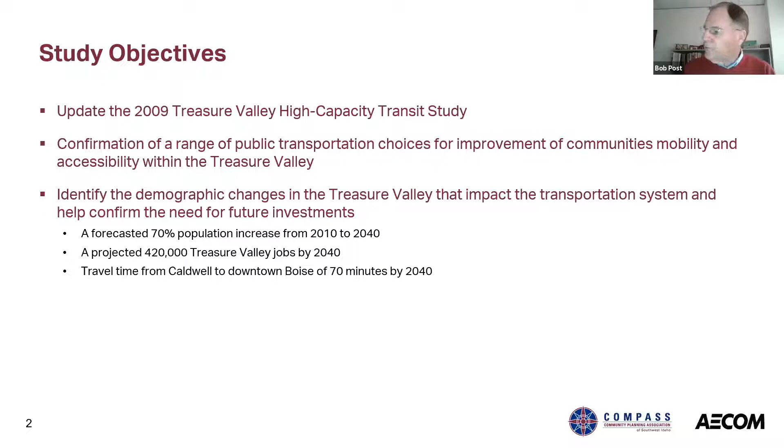It's also to identify the changes that have occurred, and there have been a lot of them in the Treasure Valley. In addition to the projected high level of increase in both population and employment, there's also, as all of you can probably appreciate, an impact on the transportation system in terms of travel time and level of congestion. So those are items that were addressed during this brief update. Next.

Before we go on, let's just step back a little bit. What do we mean by high capacity transit? Generally, as a loose definition, it's talking about transit that's faster than a local bus. That's in part because it stops less frequently and has stops further apart. Generally, it carries more people because you funnel service into it and take advantage of the capacity of these kinds of systems.

And also, they generally come with a special branding and improved services, improved dependability, and improved amenities in terms of the station stops. I want to also make an additional comment. I realized when I went back through these slides that it looks in some fashion like local bus is not an important component, and I don't want at all to convey that message.

Any community that brings high capacity transit into their mix of transit and transportation services will always depend on a local bus system that's vibrant and effective in moving trips in and around the region. So I just wanted to make that clear before we moved ahead. It's not anticipated that the local bus service goes away or is not an important component. Next.

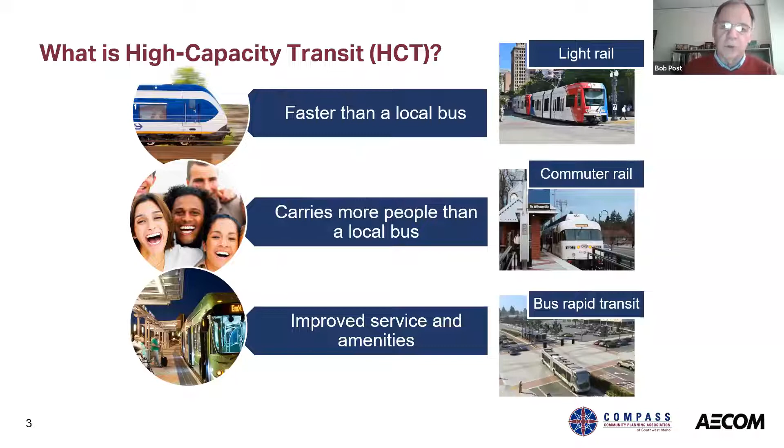I want to introduce you to the 4 basic alternatives that are being considered and were considered as part of this study. The first one is called bus rapid transit, and we further define that as in mixed traffic. So it's an alternative that has buses for the most part operating in mixed traffic except at major points of congestion, where there may be specialized treatments in terms of the signal system or lane allocation in order to allow the buses to get through those areas quicker.

The stops would be less frequent than the typical 2, 3, or 4 block spacing that you see of the local bus service. So maybe in the range of a half mile to 2/3 of a mile would be typical for these kinds of projects. Generally, we try to brand the system in terms of the signage, the buses, the stops, and upgrade the stops and the shelters for these types of applications. Of the alternatives we're looking at, this is the least capital intensive in terms of cost.

Next, we have a second category that we've looked at in terms of bus rapid transit. This is bus rapid transit exclusive, which, as the name implies, means that a good portion, if not all of the alignment, would have the buses running in a segregated exclusive kind of operation. On the left side, you see lanes that are totally dedicated to the bus. That's from Eugene, Oregon. The 2 photos on the right are from the LA area, where a portion of the orange line runs in an abandoned rail right-of-way. Other portions run in a lane dedicated to transit, but only striped with rumble strips in between the general traffic. This would have wider station spacing, so maybe a half mile to mile spacing.

The stations, as I mentioned for the other BRT alternative, are upgraded in terms of the amenities, and often the buses used for these types of systems would be larger buses. Articulated coaches would be fairly common. The cost would be higher because you are creating a dedicated right-of-way. Next slide.

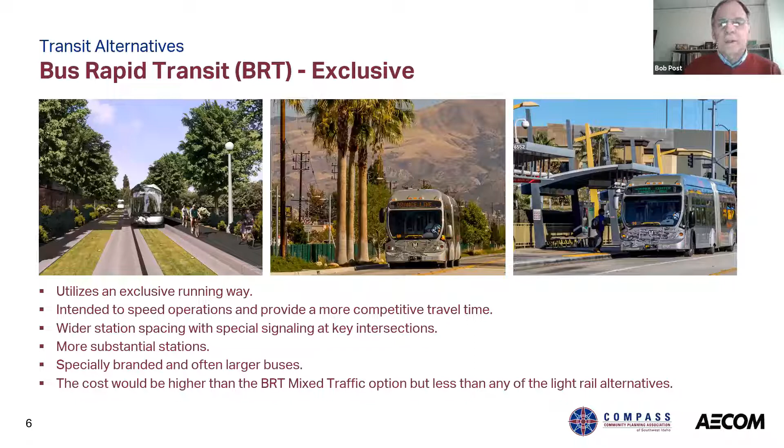Next slide is light rail systems. You may be familiar with that, in that there's a number of systems in the Northwest using light rail, electrically powered. They generally operate in exclusive right-of-way because they go at higher speeds, and they provide a more reliable service because they are segregated from general traffic. Stations are more robust and on average may be somewhere in the half to 1 mile station spacing. The crossing of streets, even at a station location, most times would require protection, either gated protection or use of the street signal system.

These systems can also, in order to add capacity, have multiple units. In other words, besides being able to operate as a single vehicle, it could operate connected as 2 or 3 or more vehicles to address capacity over time. And as you can imagine, because it has its own right-of-way and is segregated from other traffic, this is a higher cost alternative compared to the others. Next.

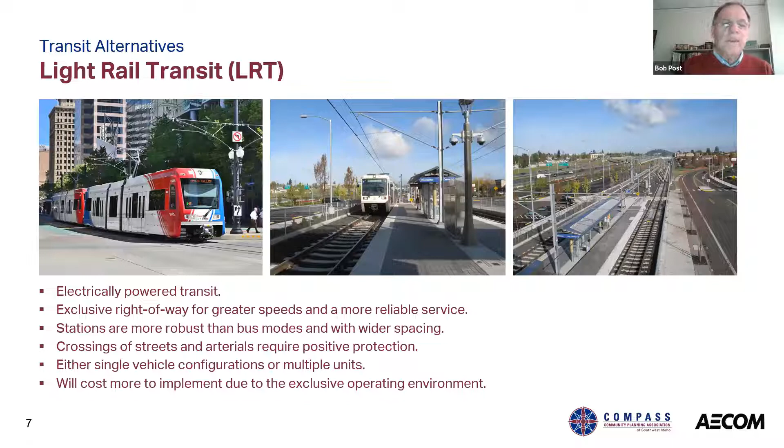The last category is commuter rail, and commuter rail has higher speeds. Generally, station spacing is much more, ranging from 3 to 5 miles between stops. Many of these systems have been implemented using freight rail right-of-way that's either been abandoned for freight use or is lightly used for freight operations. It uses a range of technologies. It could be either diesel or electric. Those are the 2 most common. Okay, next.

What I just went through was the 4 alternatives, and I wanted to show how they relate to each other in terms of the speed of operation, with higher speed alternatives shown higher in this graph, and whether they serve a regional or local level. Certainly commuter rail and light rail are often seen as higher speed operations because they're usually segregated from general traffic. Bus rapid transit covers the whole gamut. It can be in mixed traffic or in segregated traffic, as we discussed before. And then we're showing other services such as local service and some other special regional services, and whether they're more of a regional nature.

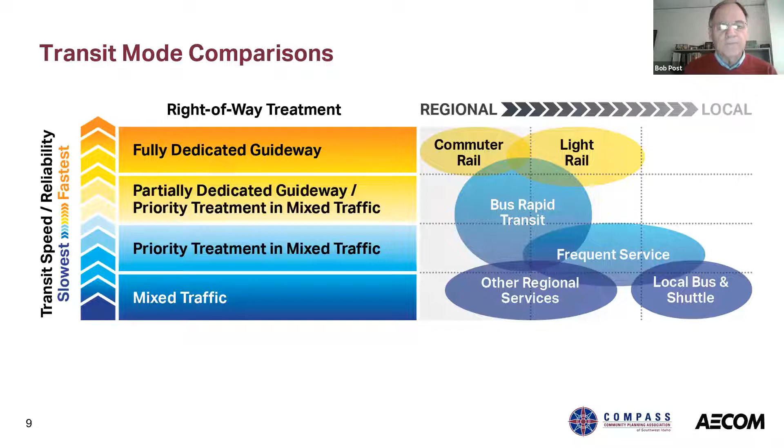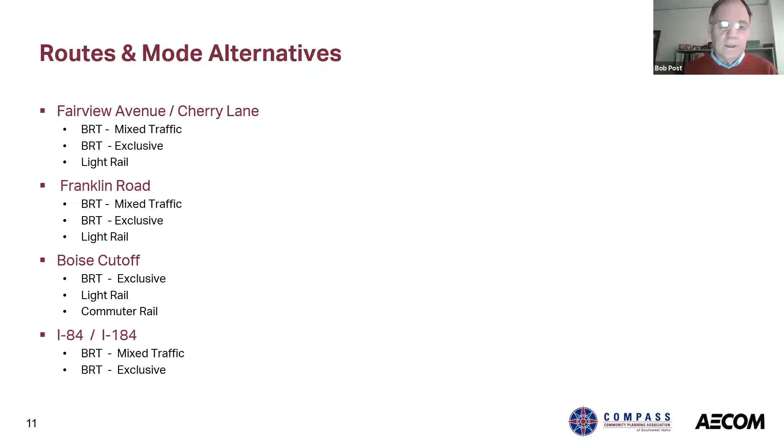Next slide. What we did was evaluate against a series of goals that were reviewed and adopted. And I want to mention that under each goal, there was a series of objectives, either 2 to 4 objectives. And we'll come back to that a little bit and illustrate some of the objectives that we did evaluate projects against. But the goal sets were, first of all, goal 1 is improve transit connectivity. How well does transit connect to major employment and residential areas, and also downtown environments. Goal 2 is improve transit mobility. A lot of that was related to how well the alternative operated within the whole range of other transit and highway improvements.

Goal 3 was manage travel demand, and a lot of that was related to the ridership element. We looked at transit supportive transportation and land use plans. How well does it support current plans and current planning and projected year 2040, 2050 plans. And then finally, looking briefly at financial feasibility. At this high level of study, a lot of that was just looking at what would it cost to build these different systems and what would it cost to operate the systems.

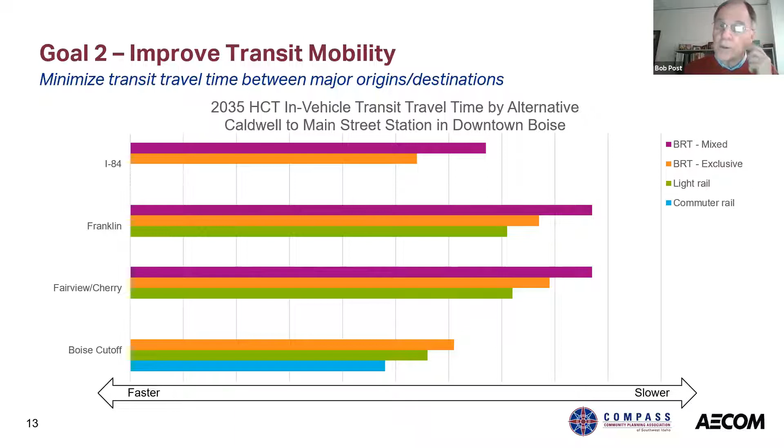Most competitive in travel time was shown at the bottom here in the Boise cutoff, and the commuter rail option was very competitive time-wise, obviously with wider station spacing and faster vehicle operations. That's the reason for that. But some other alternatives were pretty competitive. Light rail in the Boise cutoff, and then the BRT exclusive in I-84 and in the Boise cutoff were also fairly competitive. So obviously at this high level, there's a lot of refinement to be done, but I think this gives you at least an initial feeling for how the alternatives perform in terms of travel time.

And I would expect, even though the specifics of the travel times will change as the projects get more defined, I suspect the relationships between them would be somewhat the same. Let's go to the next slide.

Travel demand, which is the ridership, and this is a 2035 based on the projections that were done 2009, and I'll explain that a little bit. Obviously, there is a desire to update those to year 2040 and base them on current population employment, but that information from the census wasn't available during the time this study is being done, and so that's a task that's

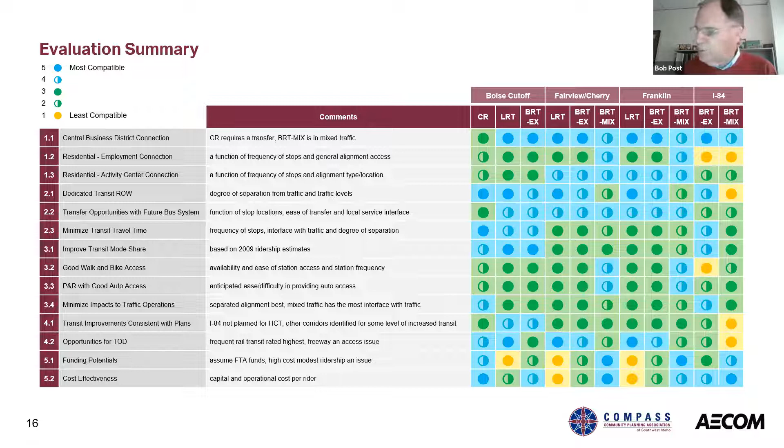So that provides just a visual representation of how the alternatives fared. Obviously, in moving forward and looking at the alternatives, we get into much more detail, and these then become hard numbers in terms of cost, in terms of cost effectiveness, in terms of other categories that can be measured that way.

Next slide. We were asked to make some observations, recommendations and kind of suggested next steps. So go to the next slide. And so here's what we took a look at in terms of the short-term next steps and recommendations.

First of all, it's always helpful, because it's key to investing in high-capacity transit, to know what's the ridership. And as I mentioned before, the data from the 2020 census is not available broken down in a level that can be used for ridership projections at the time we were doing this study. So that's a piece of work that needs to be done, and a piece of information that will be valuable in taking a look at these alternatives.

We also suggested that it's likely any of these alternatives could potentially qualify for federal funding, which I think it would be wise to pursue. Typically these days it could pick up to half the cost of a project, and there is some rumor that that level of federal participation could potentially go up.

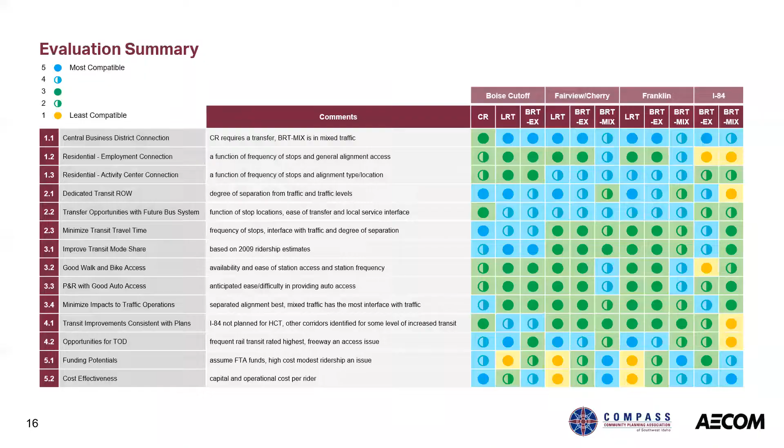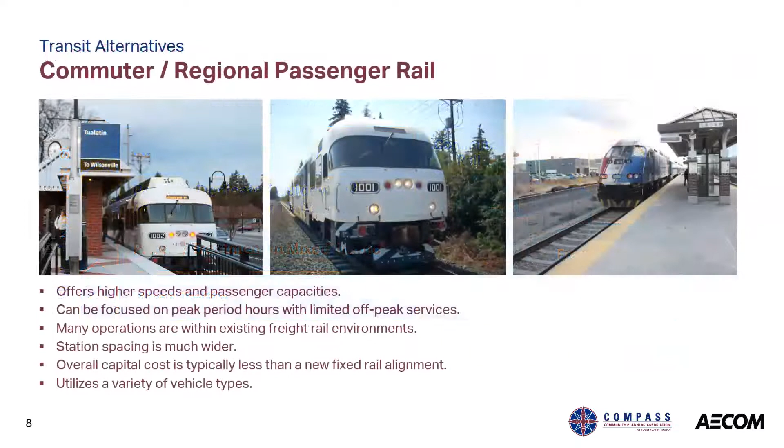Great, thank you, Bob. We had several questions generally dealing with location. If you want Jonathan to go back to the slide that showed the region, it was just the second or third slide. Several general locations asking about why Southeast Boise was not included in there. One more back, I think. Keep going. Oh, and still keep going. Sorry. There. Yes.

Some questions about Southeast Boise, the Micron facility in Southeast Boise, the airport, why those weren't part of the broader study area, and then also a question about Star and Eagle north of the Boise River, which I'll ask you to respond first, Bob, but then I may ask Rachel Haukkala to jump in a little bit because she can talk a little bit more as well about State Street and the Boise Star Eagle area.

I wasn't around when the original corridor was defined, but I think the corridor that you see defined as broadly as the Treasure Valley corridor was focused on simply because the dramatic growth in that area. That doesn't mean that other major attractions, such as the airport, Micron, and others, don't warrant a similar consideration. But this is unique in terms of the magnitude of the growth, but also the corridor, which is linear, which lays itself out well to high capacity, which are generally described as longer, whereas the access to the airport and Micron and some of the others in the southeast would be shorter and lend themselves more to a specific focus just on those categories.

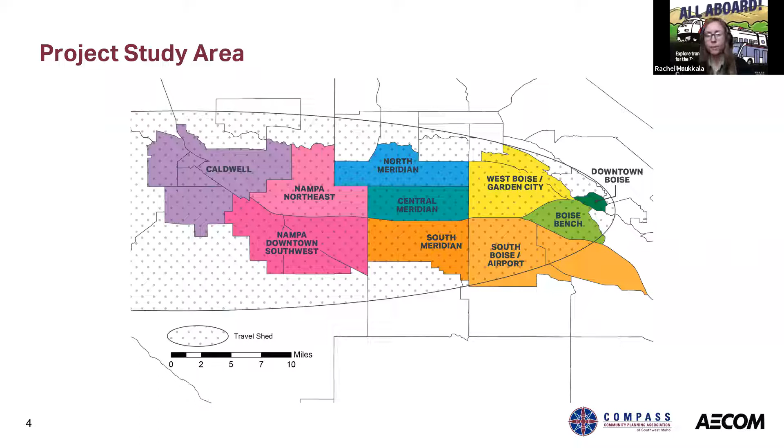Yes, thank you, Amy. And I would agree with what Bob said about the original corridor being where we were seeing most of the growth, and especially along the interstate. So looking at a high capacity transit to help alleviate some of that, as we're expecting to just continue to see that growth into the future. And then as far as Eagle and Star, Valley Regional Transit is working on a State Street bus rapid transit project already, which will probably come before this, and that's looking along State Street from downtown Boise out to Eagle and possibly beyond. So that is in progress already for that corridor. Thank you, Rachel.

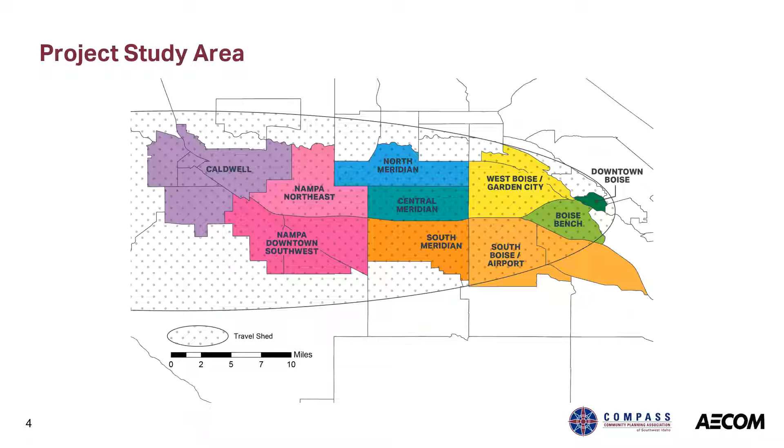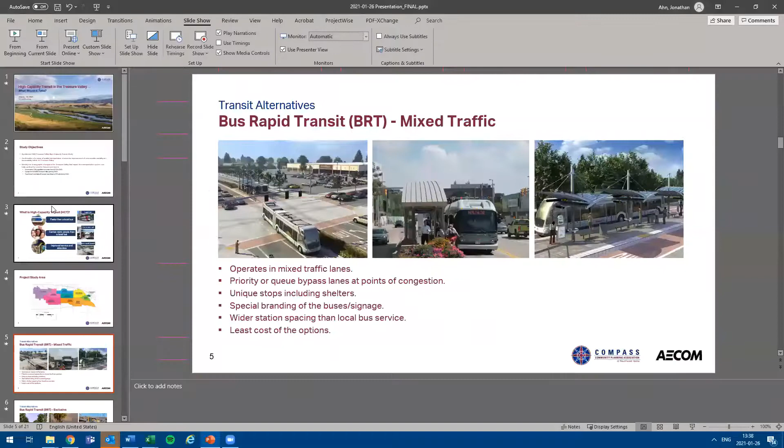Next question has to do with goals. The question was, why wasn't a goal to reduce traffic on highways and streets, as well as goals related to emissions and pollution? I think that's captured in the overall goal area of mobility, in terms of that's not just how you add additional service, but it should come in the context of how do you address the overall movement of people and goods within a geographic area.

And so, you know, although it wasn't part specifically of this study of all high capacity alternatives in the corridor, certainly, as the ability to fund these kind of improvements, and also highway improvements, which in order to add a lot of capacity in this corridor would be also extremely expensive. What do you do to moderate the amount of demand and change that dynamic?

And maybe, I don't wish this on anybody, but we probably learned a lot from the pandemic about people being able to do a lot of work remotely. And I suspect that some of those trips that are not being made today will continue to be not made. And so there may be a different dynamic out there, and it'll be hard to gauge that for a while.

But yes, part of the overall discussion about making these kind of investments is also what are you going to do to address the level of demand, in terms of both the highway system and the transit system, and so that should be part of the equation. But once again, this was specifically to identify the transit element of an overall program.

A similar question: was there an analysis of a dedicated bus rapid transit lane or lanes along the Boise rail corridor in that right-of-way? Yes, that's the BRT exclusive. That's one of the alternatives we did look at, which would create a bus solution if the railroad were still in operation, and that requires some form of a very positive barrier between the two. In other words, there'd be some kind of concrete barrier and a distance that's required by the Federal Railroad Administration. So, yeah, the answer is yes. We looked at that. That is under Boise cutoff.

That's the orange line there, and we did look at that alternative, and it has some advantages. If the railroad were to no longer exist, but the right-of-way were available, that would make that alternative easier to do, because the difficulty when the railroad's still there is, one, the separation I mentioned, but also how you handle the numerous road crossings, and those will all have to be gated because they do not happen in the context of a roadway intersection. So anyhow, for the Boise cutoff, we looked at BRT exclusive, BRT or LRT, and then commuter rail. We did not look at mixed traffic because we didn't think introducing traffic into that environment made sense, particularly with Franklin Boulevard being directly adjacent.

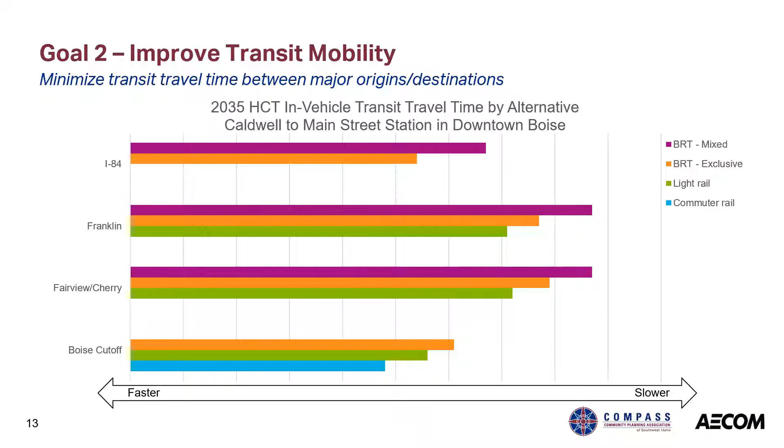And just sticking with the same theme of the different alignments that you looked at, the question is, why was a dedicated right-of-way outside the Union Pacific Railroad tracks between Nampa and Caldwell, as noted in the other COMPASS study, not considered in this study? That was a level of detail that we didn't get into much. We looked at using the street environment. It's very difficult to convince the railroad that anything ought to be on their line, and it's different on the cutoff because that's a low volume line as opposed to the Union Pacific line between Nampa and Caldwell, which is a Union Pacific main line. And from years of experience working with railroads, having a bus, let alone a rail transit alternative, within the right-of-way is a difficult thing.

And so that doesn't mean that wouldn't be looked at in a more detailed study, but at this level, we said, there is an adjacent road, and can we find a way to make use of that? And so, excellent question, because it is a right-of-way. It's there, but it is a mainline right-of-way, which is a different situation than the Boise cutoff, which is not a main line.

I don't know if I got that. So changing. Sorry.

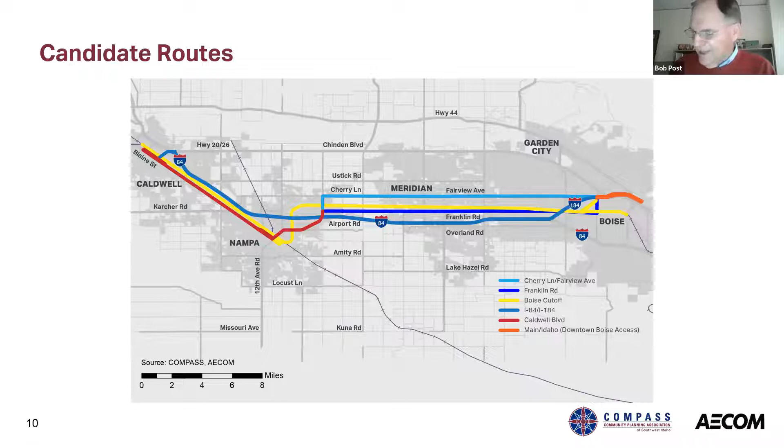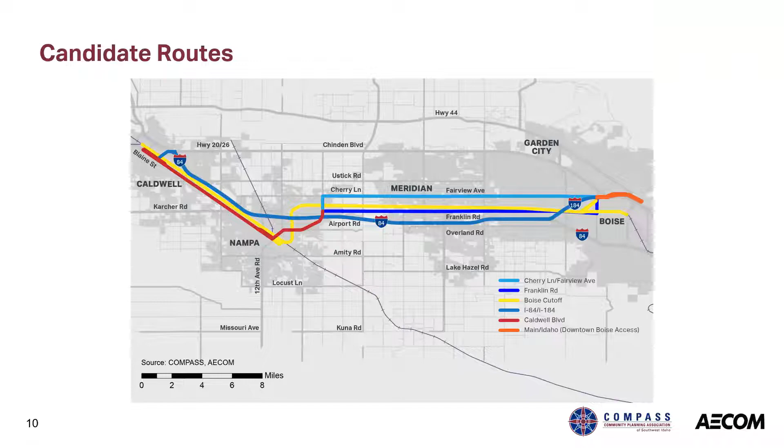Same thing with commuter rail. We looked at similar systems. We obviously didn't look at the Seattle system because it's a much more robust system and it's totally segregated. So we looked at operations that are more similar. Examples would be the Salt Lake City area commuter rail, and the commuter rail in Portland would be similar in nature to this. So we used those as comparables, brought the cost to current year cost, and made some adjustments if we thought there were unique aspects that varied in Boise as opposed to these other projects. But there's a reason it's called order of magnitude, because all we've got right now is a line on a map. We don't have any design. So these are based primarily on industry experience.